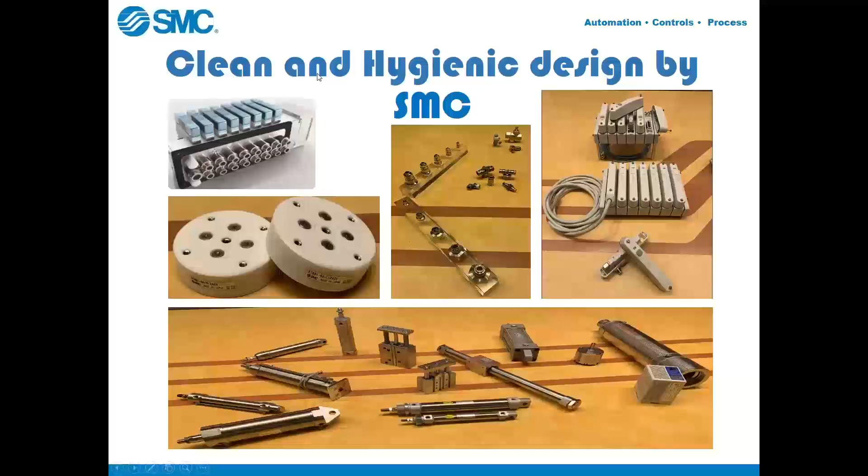I have a short PowerPoint and some hand samples that you can be viewing through my webcam during the presentation. So we'll get started here. First off, we start with our valves, our solenoid valves, directional control valves, some people would call them.

On this slide here, you'll see our panel mount valve solutions. They are NEMA 4X compliant. This is a package that mounts bulkhead style, if you will, in the control cabinet itself. So all the external components are made of stainless steel, and then all the electrical components are housed inside the cabinet.

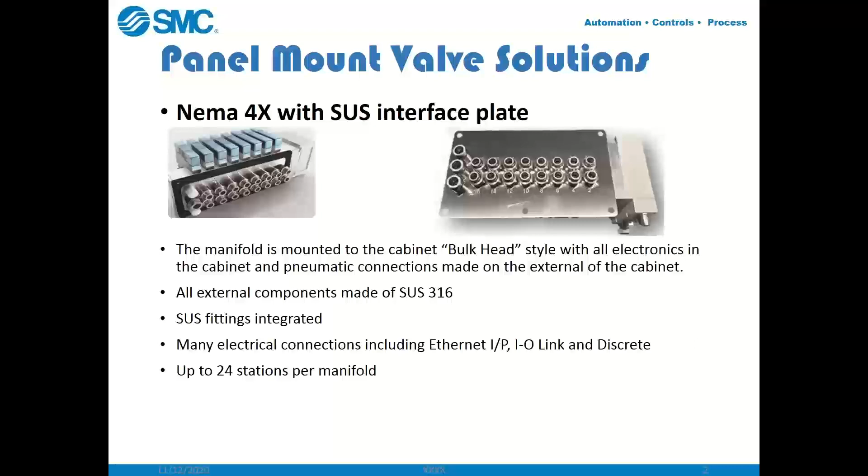There's also stainless steel fittings integrated into it, and we can do discrete wired or Ethernet IP, IO-Link as well for those that like bus communication systems. So that is a panel mount valve solution for SMC. I do not have a hand sample of this one, but we can get them for you if you'd like an in-person visit from your local SMC rep.

Moving on is our IP69K valve manifold. This is an on-machine solution. It is a washable, crevice-free exterior. You can clean it without disassembly. All the hardware on the manifold is stainless steel, and it does come with bottom ports and a standoff, as you can see here in the picture to the right. We're looking at a product release on this line of Q1 of 2021.

I'm going to flip to my camera here. So here is our hand sample of our IP69K valve manifold. You can see that there's ample room for washability in cleaning out any debris that may fall between the valve stations themselves. All surfaces are contoured, you can see, so there's no pooling of water.

This is the bottom of the manifold, and it does have stainless steel fittings integrated into it, and then the machine standoffs as well. This particular unit is IO-Link compatible with an M12 connector on the bottom for connecting to any type of bus system. So that would be our IP69K manifold solution. And again, this is an on-machine valve solution, so no need for an electrical cabinet to house this device.

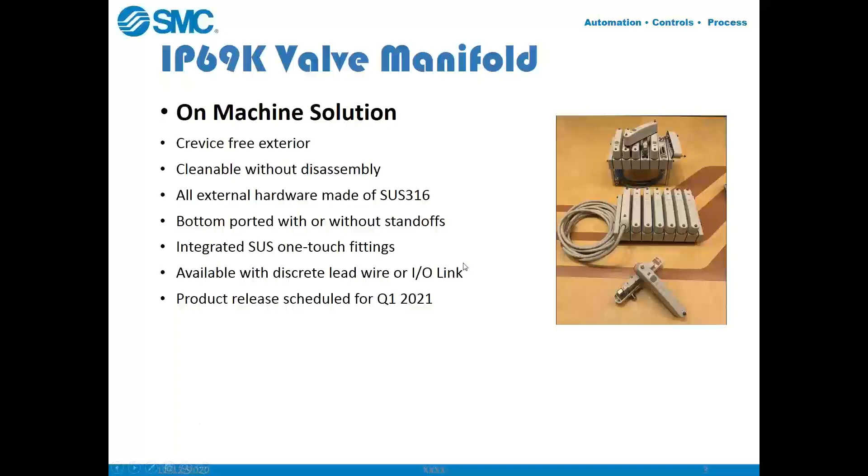I'll flip back to my presentation. All right. I think I'm sharing my screen here. Here we go. All right, IP69K valve manifold. We're going to move on.

This is our hygienic NAMUR valve. We also use it as a standalone. It does have a contoured surface with stainless steel hardware and a washdown M12 connector for the solenoid. These have a standard NAMUR mount interface, so they can be mounted to any of your butterfly and ball valves that have a standard NAMUR interface.

And as you can see on the left, this is also a NAMUR valve, but on a manifold block or a subplate, if you will. Currently they rate them at IP67 and they are configurable for 3 and 5 port applications.

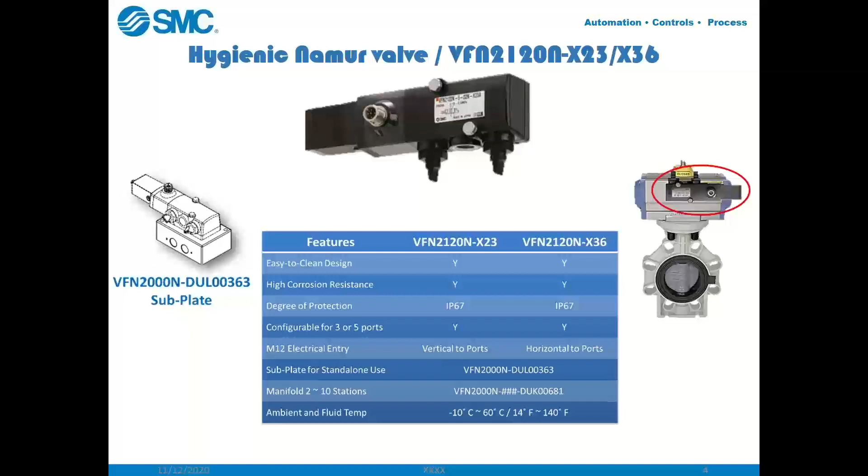I will turn my camera on here. I'm trying to flip back and forth here. There we go. Here it is in all its glory. All stainless steel, solenoid connection. This one's a lead wire with a conduit port. Again, all stainless, 2-port solenoid valve.

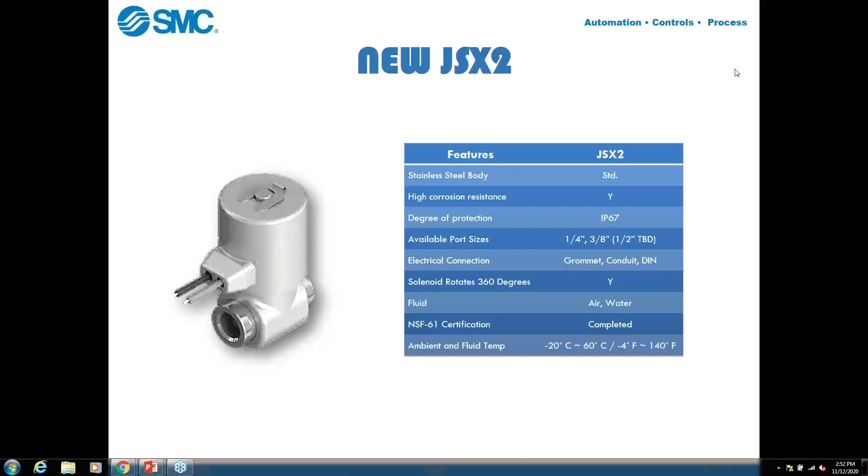Moving on to environmentally resistant actuators. The CG5 and the CJ5 have been SMC's mainstay for a very long time, and very economical in price. This is a corrosion resistant type cylinder, and it also incorporates some FDA compliant materials in the design via an X option, the X2977, which would be safe for food zone use.

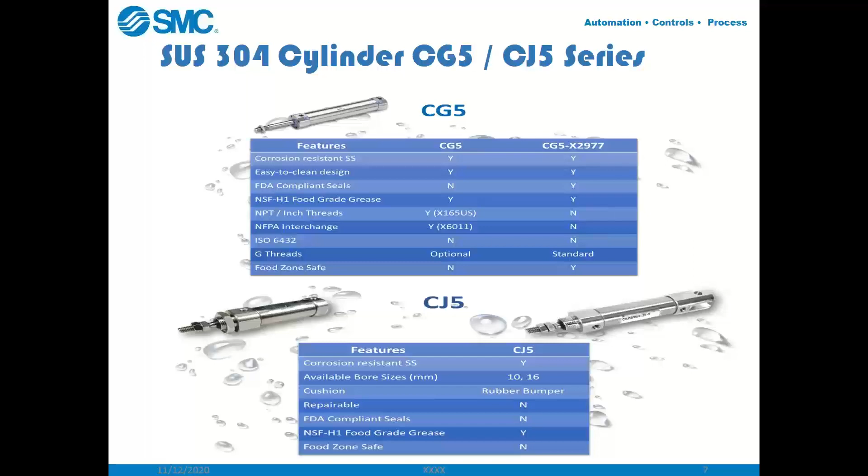This is the FDA compliant version of the CG5. As you can see in the picture here, the rod seal and the air cushion seals incorporate an FDA compliant material. The label is laser engraved, and all of the surfaces are chamfered so as not to collect any type of food debris, making it highly cleanable and hygienic.

Here's the CG5 again. Little socket head screws here for the cushion adjustment. You can see the blue material utilized for FDA approved applications. All the chamfers on the rod cover and head cover are there for cleanability. So this is our CG5 X2977. It's a clean design, FDA approved actuator.

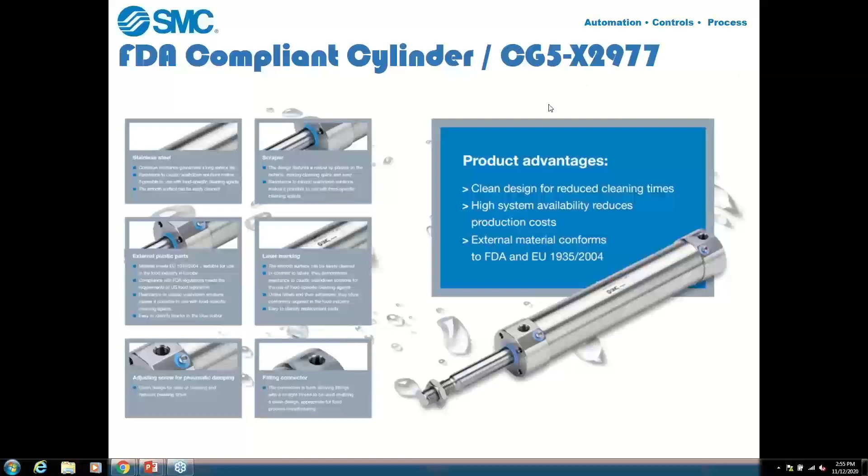Moving on, the 2977 is something that we developed for a specific customer, but now we're offering it to all of our customers. It's a CG5 with a switch rail built on it to be used with our Hygienic Washdown auto switch. This is all, again, a corrosion resistant exterior, stainless steel. And you can kind of see the switch rail in the photograph here, but I'll show you a hand sample here. 1 minute.

So here's the hand sample, and you can see that there is a gap between the switch rail or the switch mounting surface and the surface of the air cylinder. That is to make it cleanable and washable, so you can flow debris through there with some type of pressure washing equipment. So again, all stainless steel design with the switch rail for hygienic switch design. All right, moving along.

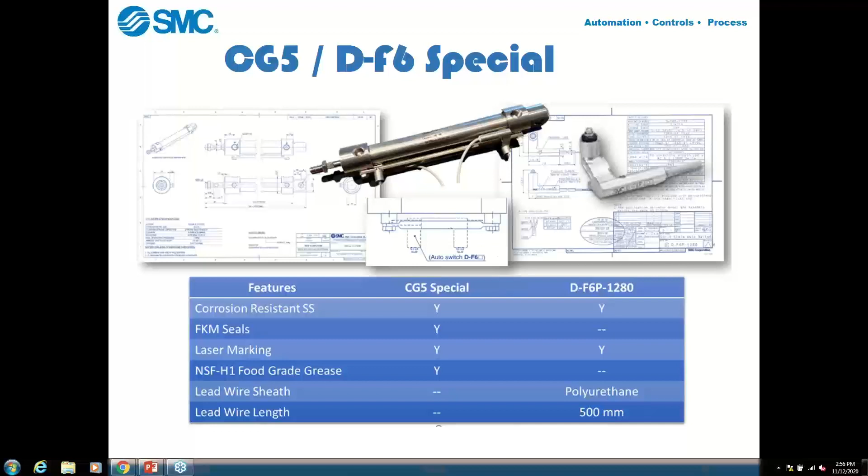Our all stainless steel guided cylinder MGP with the X2532 option. This is a corrosion resistant stainless steel, all stainless steel guided cylinder, with bore sizes from 20 to 40 millimeter bore. And again, all these have the NSF-H1 food grade grease incorporated into them. So very heavy duty, very rugged for overhung loads. And I'll show you this right now.

Here it is. So this is all stainless steel. It's very similar to our standard MGP. The surfaces are flush with very little contour outside of our auto switch mounting grooves, as you see here. It is a free mount design, so you have mounting holes on almost all of the surfaces, and the tool plate, guide rod, and piston rod are all stainless steel, and there's also a rod scraper incorporated into the design as well to keep any type of moisture out of the bore of the cylinder.

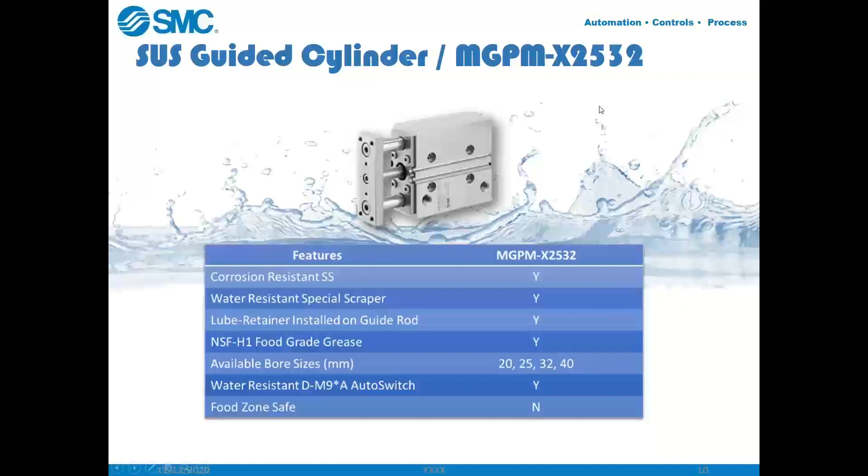All right, from the MGP, we'll move to our stainless steel magnetically coupled cylinders. This is based off of our CY3B Series, magnetically coupled. And the surface is all corrosion resistant stainless steel. It does have rod scrapers and the food grade grease, FDA compliant carriage bushings as well. I do have a sample of that one here.

That would be this guy right here. You can see that there's very little contours or crevices in the surface, so it's fairly hygienic in design. The tube is round, and you've got the magnetically coupled carriage traveling back and forth with air pressure. So all stainless steel design, CY3B.

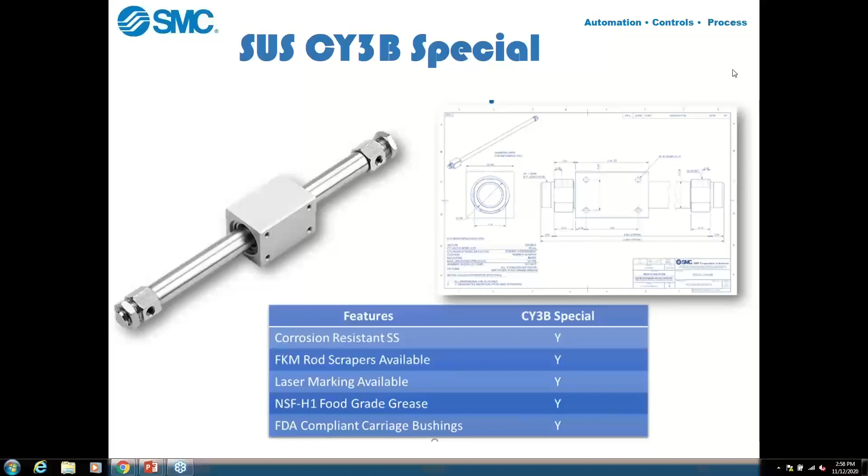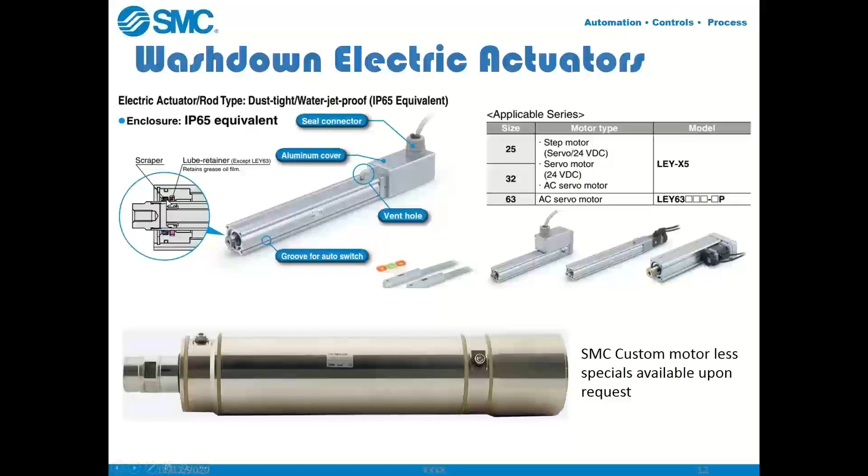Moving on from there, we also offer electric actuators in washdown versions. Some of you may be familiar with our LEY and LE series product. Currently, we have an IP65 equivalent LEY series. This is a ball screw actuator driven by a stepper motor with encoder feedback. As you can see here, we do incorporate a scraper around the rod and a lube-retainer to keep the lubricant on the rod, so in wet environments we don't get any rusting or binding.

There's also a positive pressure vent hole. Sometimes we pressurize this vent hole to keep any type of moisture out of the actuator itself. And then, as you see here, there's also a watertight cover with a liquid tight electrical connection for your stepper motor cables coming into it.

As you can see on the bottom of this slide here, SMC has a custom motorless option as well that we do all stainless steel. I do have a sample of that. It's fairly large and made of all stainless steel. I'll show it to you right now. Here is the motor flange. So you've got a shaft in there turning a ball screw, driving the rod in and out.

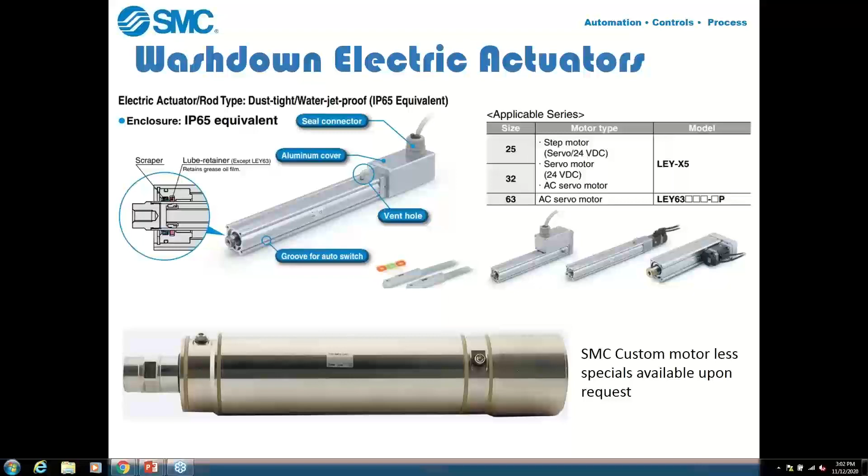And the surface is contoured again so as not to collect any type of food debris in the food manufacturing environment. That is a special. It is a custom. So keep in mind, SMC has the engineering capability to do that, and we can help you in those tough applications for electric actuators. All right, that's electric actuators. Moving on.

So we do have other environmental resistant options for our standard actuators, and that would be, as you can see, for paper, powder, and dust. We do offer heavy-duty scrapers for most of our standard actuators, so keep that in mind. If you don't have a wet environment, but yet a dirty, dusty environment, heavy-duty rod scraper is a good option to add if you're in those type of environments.

We also do rod boots or dust covers for our linear actuators or grippers to keep that dust and debris out of maybe the bearing surfaces or any type of sealing surfaces that would make it fail prematurely. Again, we also have a water-resistant special scraper and water-resistant auto switches, and all stainless steel products that we've talked about before.

Other environments that are difficult are high temperature, and we do have high temperature options for most all of our actuators, which would incorporate fluoro rubber seals and heat resistant grease. So if you like our standard actuators, please, by all means, inquire about our environmental resistant options.

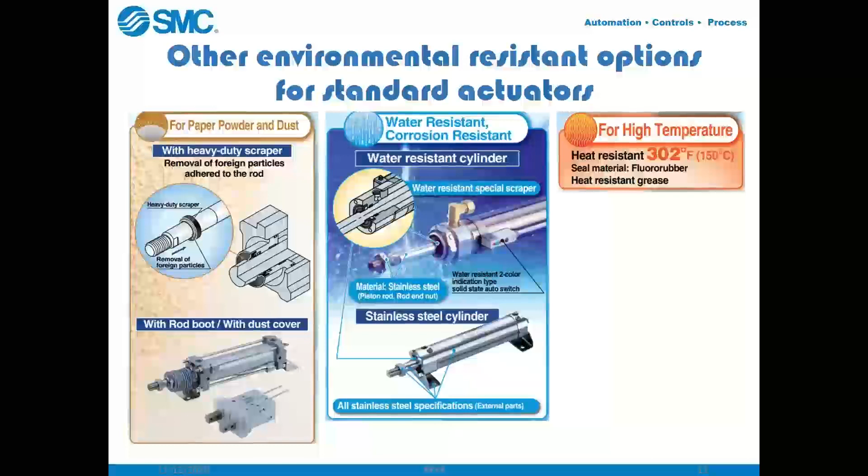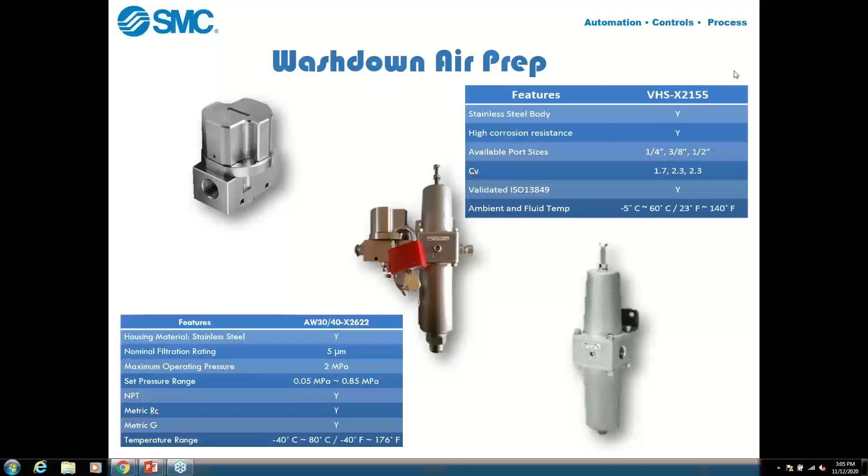All right, moving on from our washdown air prep: washdown fittings and flow controls. We've had our Series KQ-G2 out for half a decade now, and they are very popular in these washdown applications. We've also added ASG and the AS-X800. The AS series is our flow control series. Compact, lightweight stainless steel fittings, with one-touch technology for the tube connections, available in inch or metric, and good for higher temps up to 150 C in some cases. 316 stainless is our spec on the material.

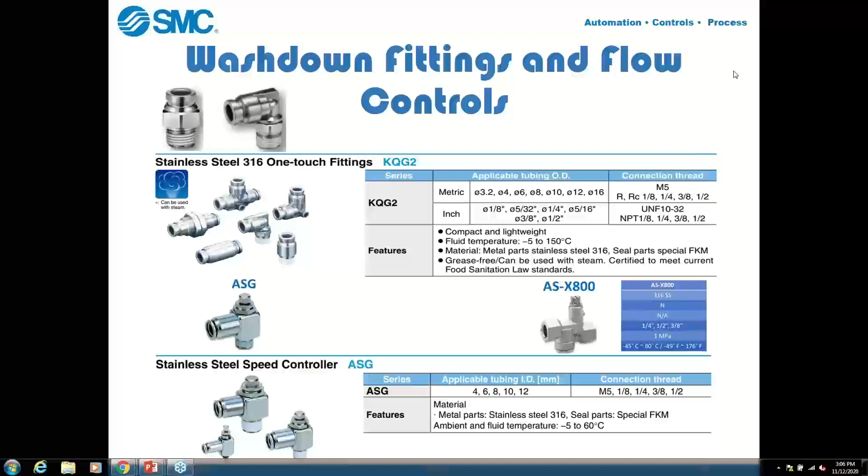So I will show you these products quickly. Here's our KQ-G2 T-type fitting, all stainless steel, and also our ASG flow controls. This would be a threaded connection to a tube connection for applications where you're threading this flow control into maybe a port of an air cylinder. We also have inline solutions here. This is the X800 series, and it's an inline design, so threaded connections on both sides. That is our fittings and flow control stainless solutions.

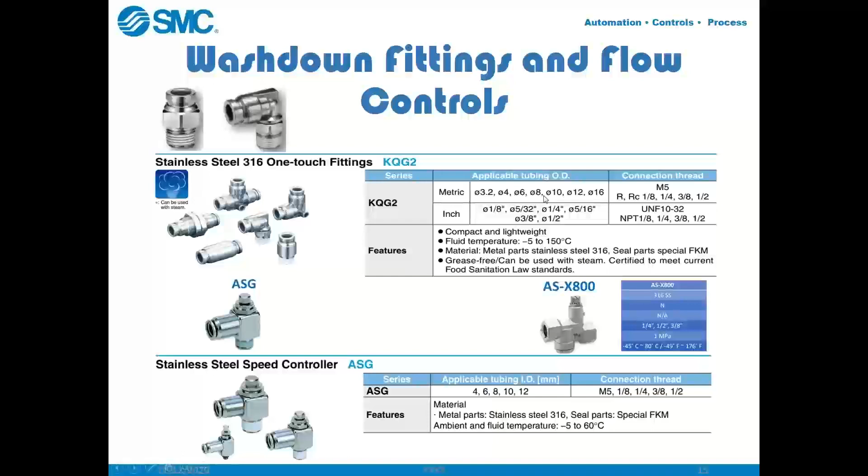All right, going back to the fittings. We've also come up with an EHEDG design, which is our hygienic European counterpart application. This design is a compression type design. All the seals are made of FDA compliant material, so we do comply to FDA, EHEDG design, as well as NSF grease used in the design. So this would be our hygienic style fitting, if you will.

I've got a sample right here I can have you take a look at. Here are the hygienic design fittings. Again, you can see the blue seal material for the face seal. Maybe my camera. Again, all the surfaces are contoured so as to make it very washable and cleanable. And an array of different tube sizes for this product. Here's the other series. Again, hygienic fitting design. So, all right, moving on.

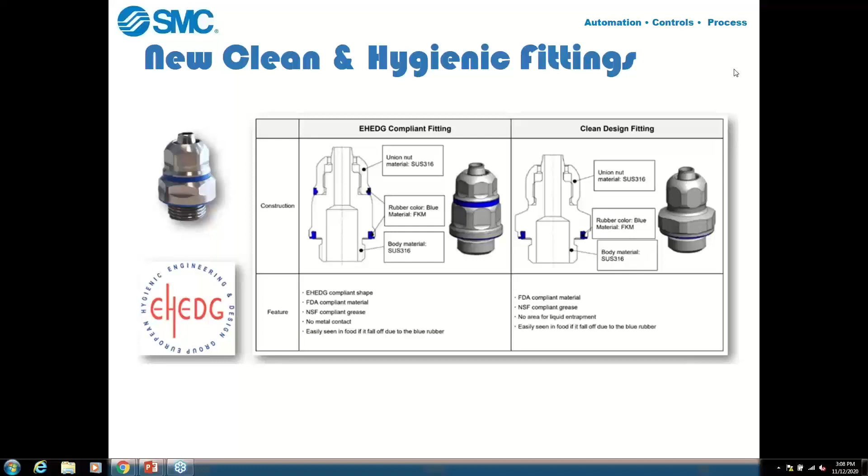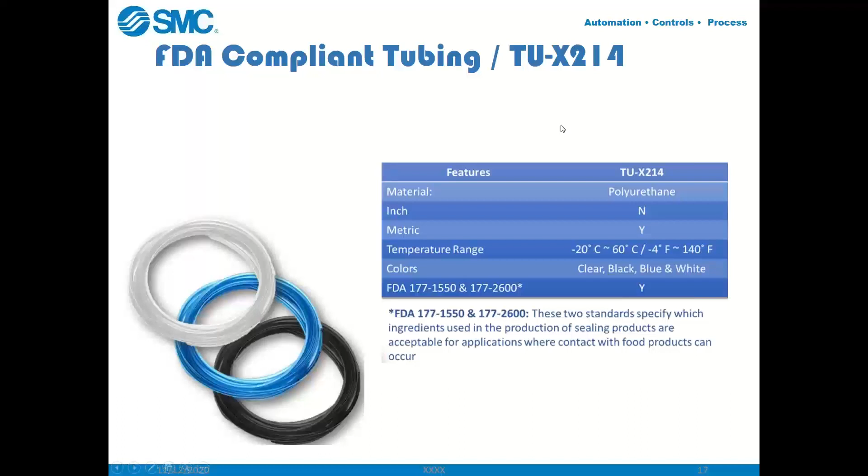I wanted to make you aware, SMC recently introduced FDA compliant tubing. This is a polyurethane material, and the ingredients used for the production of the product are FDA compliant, FDA 177.1550 and 2600. Temperature ranges up to 140 F, colors in clear, black, blue, and white. So if you have FDA needs for tubing, we can solve your problem there.

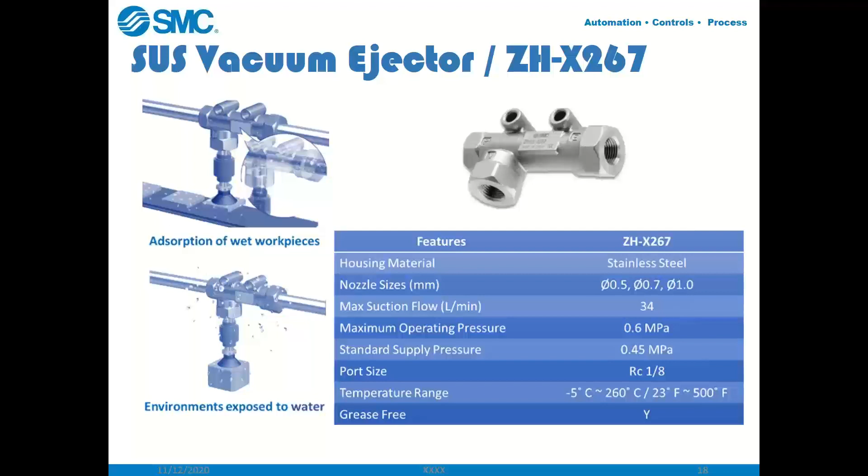Onto vacuum. This is our stainless steel vacuum generator. It is a Venturi style generator, a ZH series with the X267 option. This is an all stainless steel device. Nozzle diameters from 0.5 up to 1 millimeter. Suction flow rates up to 34 liters a minute. And again, temperature ranges, this one is up to 260 C, so very, very high. Maybe used for point of use vacuum generation, running down to your cups. And it also is grease free.